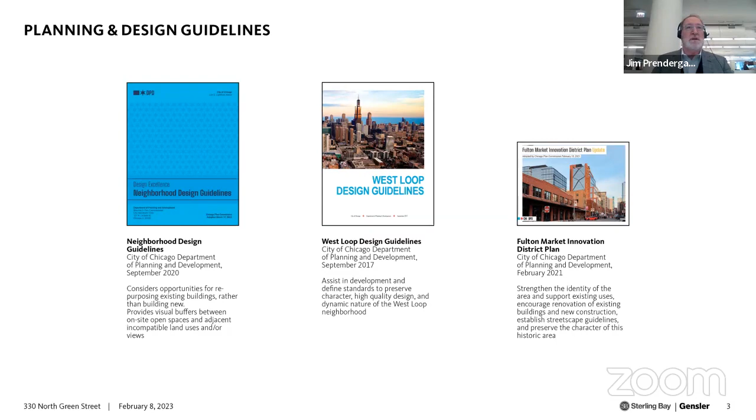So let's talk about where the site is. 330 North Green is directly opposite from 333 North Green. It anchors the northern end of Green Street along the northeast corner of Fulton Market. It is bordered on the north end by railroad tracks, Wayman Street to the south, Green to the east, and Peoria to the west.

Here is our PD application. The original PD application was two sites across this large rectangular or trapezoidal black line, and you can see that annotation in this diagram. The combination of uses around the spaces include restaurant, office, and residential spaces on different parcels around the area.

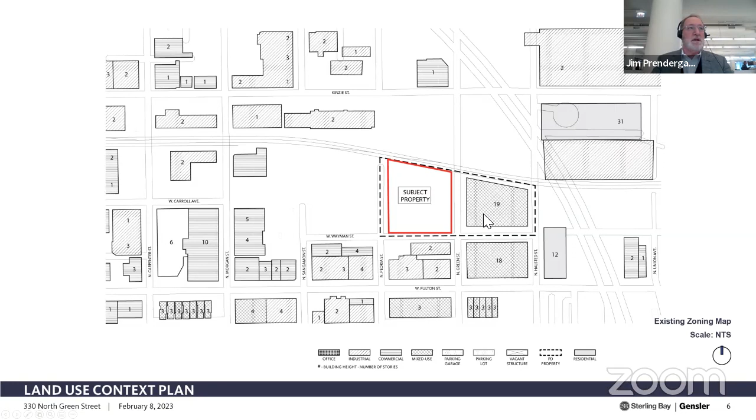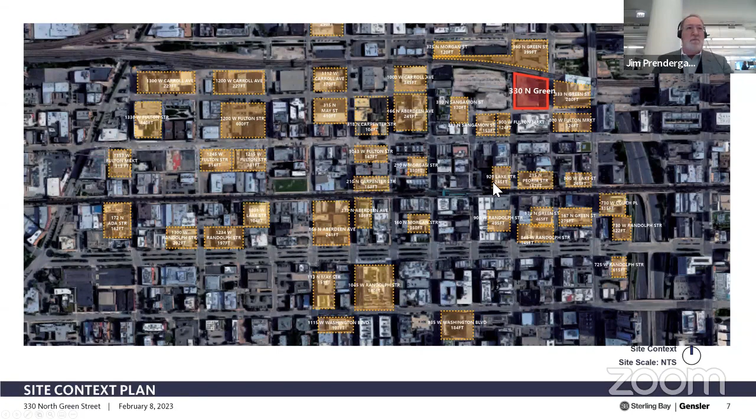Again, not kidding ourselves with the ambitious plans for the balance of Fulton Market. These are a lot of the plans that have been proposed throughout the entire neighborhood, but probably the best way to see it is to look at it three-dimensionally.

Those spaces in orange are spaces that are completed or under construction. Those in light yellow are future developments that have been proposed and or under review by DPD. But the key for us is how our building relates to our neighborhood.

We have 333 Green and 360, and we see as we go through this explanation the idea of how we're creating this kind of urban room, if you will, at the north end of Green Street.

Site orientation quickly: we're in parcels 1, 3, and 2, this larger trapezoidal shape. We're right across the train tracks on our northern border. Right now the space is leveled and open and ready for construction.

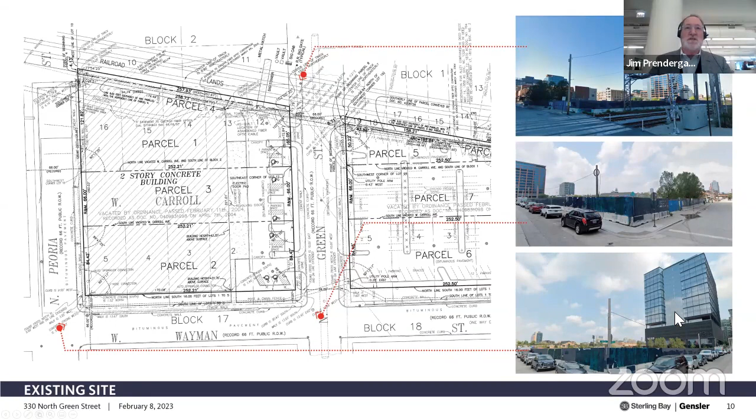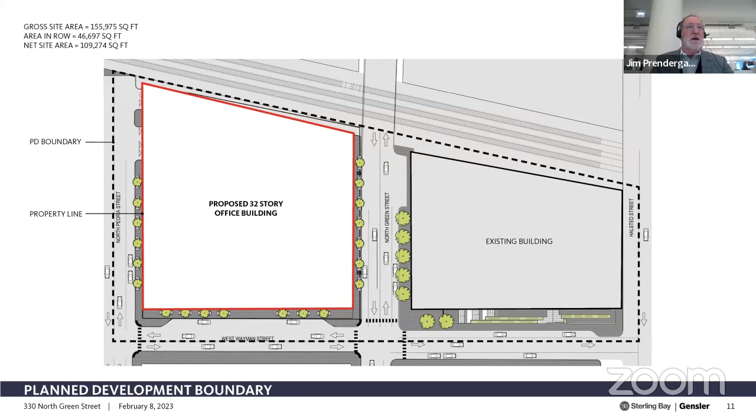Looking east on this bottom image, you see across to 333 Green with this parking podium and office space above. We're proposing a 32-story office building in the parcel that was previously a PD application that was basically a fairly straightforward extrusion of the floor plate geometry.

The original building target tenant was tech tenants, and following that idea, the building floor plates were long and horizontal with high ceilings, but basically a large lot-line-to-lot-line configuration of the whole entire project.

Well, since that application was approved, the marketplace has shifted. What Sterling Bay has discovered is that there's more of an appetite, particularly in this part of the neighborhood, for professional service firm and financial service firm tenants.

They, as a type, do not require these long horizontal floor plates. That's not really consistent with the way they're organized as businesses.

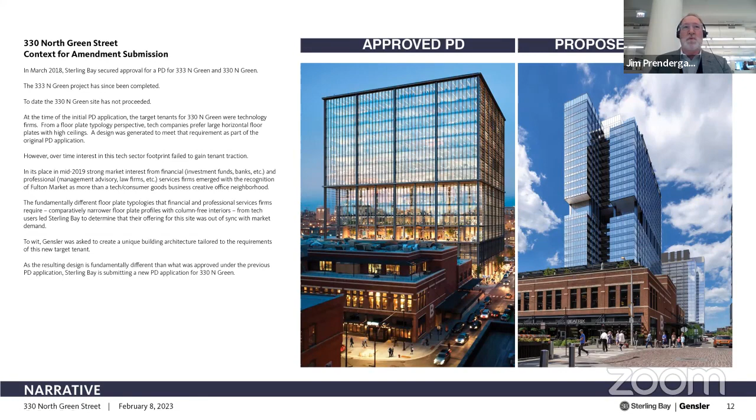So in similar fashion, we organized 360 North Green, and you see in the background there, this under construction, with Boston Consulting Group as our anchor tenant. The building is a thinner and more narrow form, one that we think is more consistent with the guidelines put forward for this part of the city.

So again, comparing and contrasting the original approved PD, you see it's kind of large floor plates at the base of the building. What we're not doing here is changing the already previously approved service access points of the site. Our ramp for our parking and our loading bays are still tucked into the dead-end condition of the north end of Peoria.

Peoria does not cross the tracks at this point, so we still have that condition in our current scheme.

But in this scheme, what we've done is placed our office tower to the west, and that's a pretty important component, we think. What that does is create a very long, over 120-foot-long walkway to get into the actual building. So our scheme proposes the idea of a light court that helps give us an urban space.

This is consistent with a lot of the experiences you see around Fulton Market. You see the covered area listed here, a setback additionally from the property line, then our open-air light court above, leading into one of two entrances to the building. I'll go through that in a little more detail in a moment.

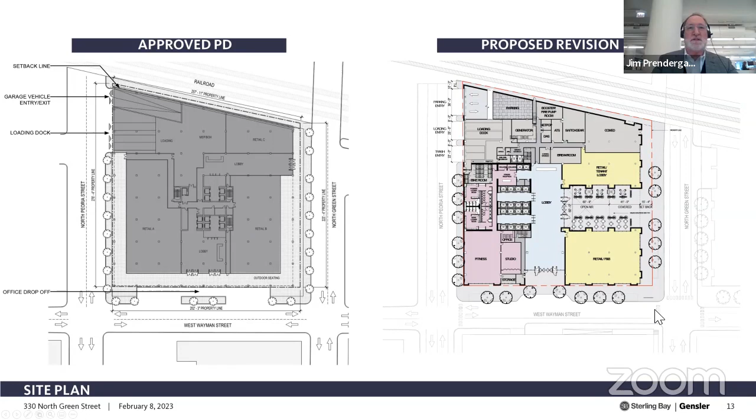But Green Street is our primary address, our naming address, and Wayman is our drop-off pickup for Ubers and other types of transit, to keep drop-offs off of the crowded sensibilities of Green Street.

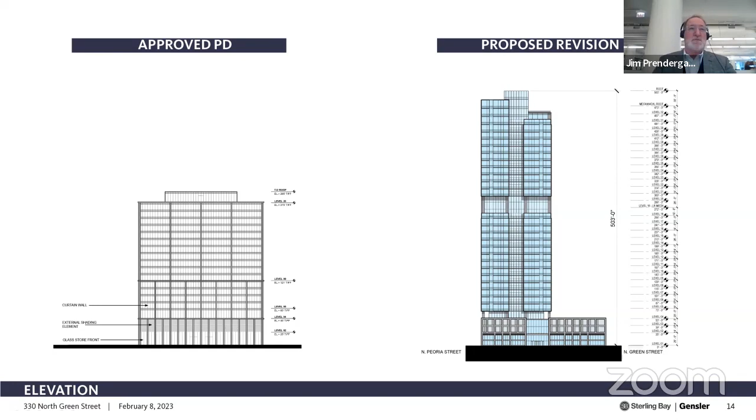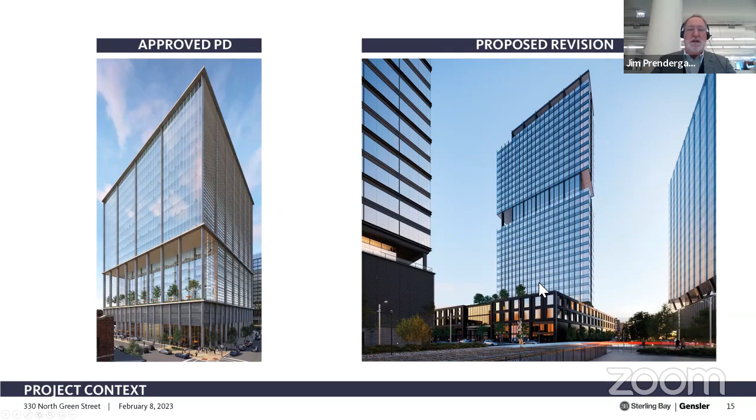Comparing and contrasting the two schemes, these are slightly different perspectives, but the view on the left is looking northwest, staying with Green Street in the foreground and Wayman. And here we are actually at the railroad tracks, so we have our Green Street, and you can see how we've pushed the office tower extremely far back on the site to make the pedestrian experience happen such that you may not even be aware the office buildings are there as you're walking on that edge of the site.

From a sustainability perspective, our baseline is a silver LEED component to the space. However, engaging our new energy code and understanding the ambitions of the public about initiatives for a more sustainable future - we're in early days now in the design, we're only a concept, but the project will be incorporating principles of passive design, advanced high performance systems, and improved occupant experience conditions.

We're looking to reduce operational carbon through facade systems, passive and active design strategies, energy efficient systems, all electric heating. The project will incorporate high quality spaces to promote tenant satisfaction and improve productivity. We'll incorporate design elements for indoor air quality, biophilic design, and sustainable product selections throughout the specification of the project details. We will also be incorporating bird-friendly design strategies, including collision mitigation elements, bird-friendly year-round interior and exterior lighting controls and lamps. No internal greenery will be visible from the outside of the building, and exterior grates will not have openings greater than 3/4 of an inch. These are part of the palette we're working with as we continue to evolve the design, but we're aware of the criteria and interest in these issues, and we're looking forward to investigating them further as we go forward with the design.

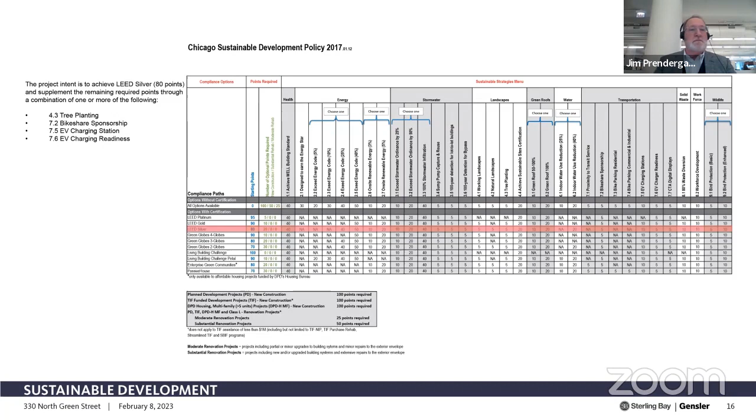Okay, page 17, here we go. So the program brief was about this different type of use for the space. So we started to look at the idea of designing the building from the seat to the street - how do we envision how people will use the building and how that might inform the building's architecture?

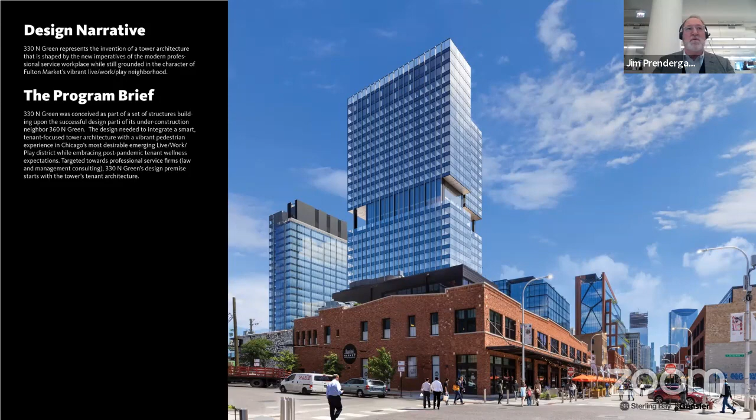We started by looking at first the idea of what we had before, which is kind of an edge to edge form massing of the building. Then we started to look at a point tower, looking at the shape of the building, but making it smaller, moving it around the podium in different ways. But we found it didn't really address the issues of how the tenants will use the space. This point tower concept does not work really well for professional service firms and financial service firm clients. I'll explain that in a moment.

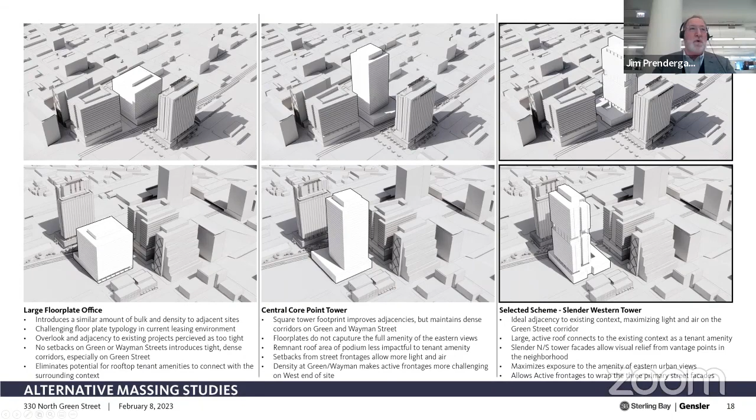So we ended up looking then at this kind of shifted tower plate configuration, and then we experimented with different ways of organizing that on the site. The first thing is to think about how a professional service firm and a financial service firm works - the priority is for perimeter window usage. Actually, their business models have evolved to a point where they don't need a lot of interior storage space - a lot of deep, dark interior space that a rectangle would provide, we don't need. So the concept is to basically not build what we don't need.

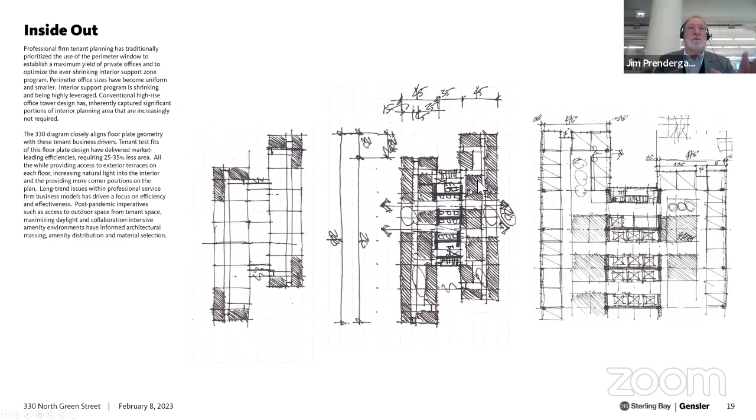So the concept of the building is 2 office blocks, full floor to ceiling glazing for natural daylight penetration and column-free spaces inside. Basically, they're hung essentially on a structural core. It's a very simple concept.

We then looked at the idea - well, if we have that as our typology, how do we move it around the site? Are there any advantages to looking at diagonal orientations, pushing things closer to Wayman, more across the railroad tracks to the north, bringing it closer to be adjacent to Green Street? As an urban gesture, we felt it was best to move it, as we've shown you, all the way to the west, giving views to our friends in 360 North Green to still see down across into Green Street.

Our building on Wayman is on the northern edge of the historic district, so we have clear, unrestricted views for blocks looking to the south. We really thought that was the most urban-friendly and neighbor-friendly configuration for the building.

So this gave us our parti: two office blocks, clean column-free interiors, 45-foot spans, and the idea of amenity terraces for tenants on both ends of the building, tucked into the interior notches between the two plates to help cut down on wind exposure.

This also makes the terraces more intimate in space and helps with leasing. Each tenant on the east or west side of the building can have their own terrace, which goes back to this wellness configuration of having the ability to get outdoors on your floor without having to leave it for a common amenity floor.

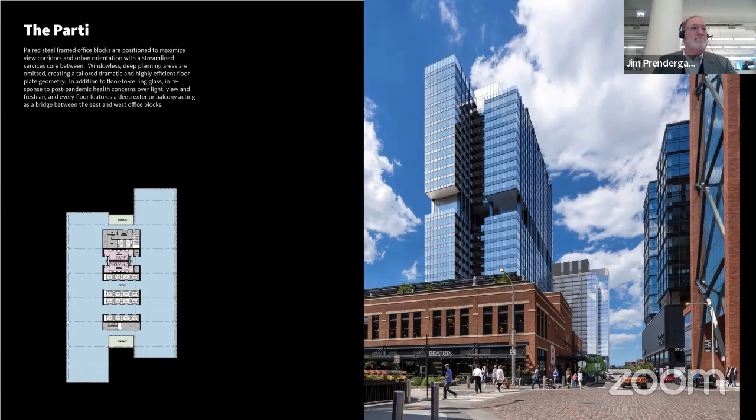Again, the building is pushed back to the west. We have this notion of creating an urban room, a lot of air and light around the office tower itself, being a respectful player with its neighboring buildings.

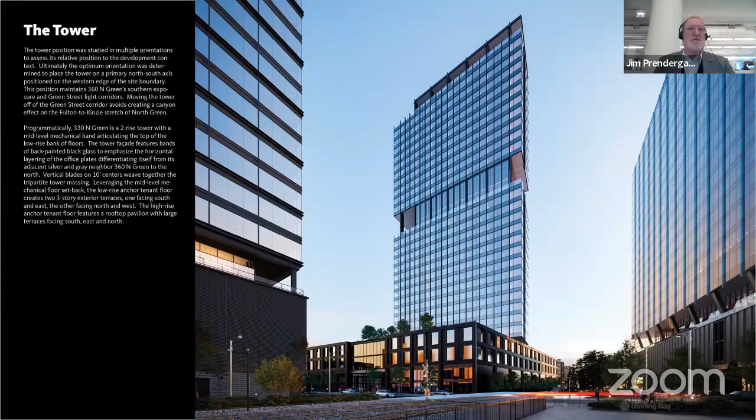The Wayman entrance was important because it touches on the Fulton Market connection and the way we organize the building.

We're cladding the podium in a dark gray brick, echoing the industrial palette of the overall Fulton Market experience, but also creating discoverable spaces at the second entrance, retail on the street level, and connecting to the Wayman experience going up to Wallstead and our friends at 800 West Fulton.

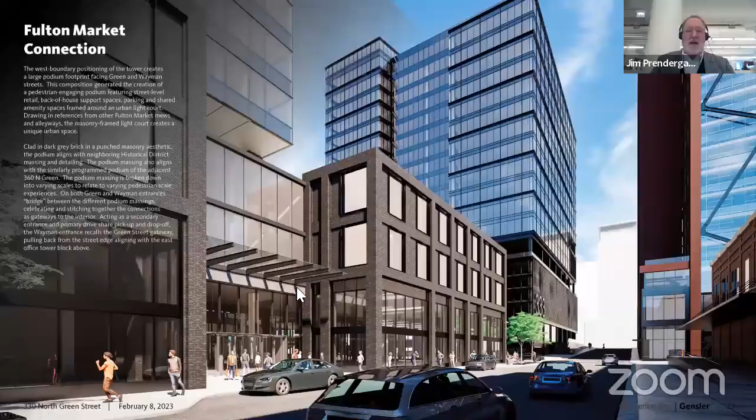The light court is a unique solution for us. How do we manage this deep walking space from green to the office front door? We love the idea of having the space give you a surprise.

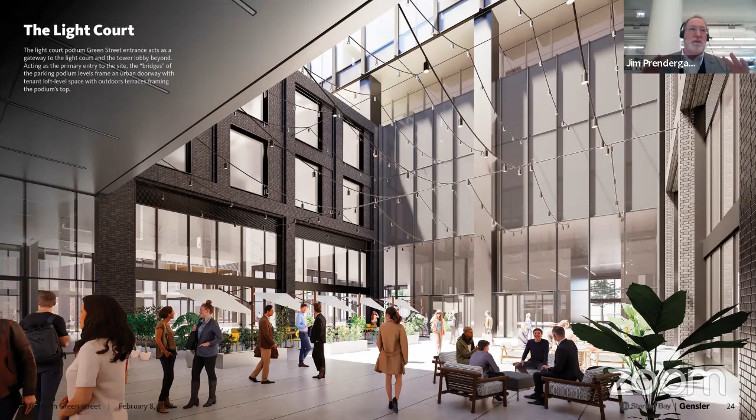Consistent with a lot of the elements in the Fulton Market experience, this journey of discovery lets you learn more as you walk through the building, and spaces become unique and special. This gives outdoor dining environments for our food and beverage options, but also creates a special event space that's physically open to the public and easy to get to.

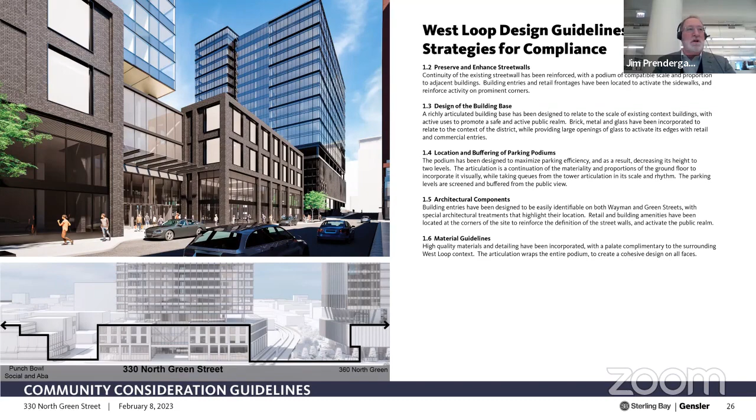We're excited that our parking block is the same size as that 360 — about the same size as the Punch Bowl building. So the entire west facade is no more than a three-story expression across the entire three-block stretch of Green Street.

I'll skip on this since we've talked a lot about it already — the access points around the building, the parking block, amenity space sitting on top of the parking, the office floors, and the elevations, which I think you've seen.

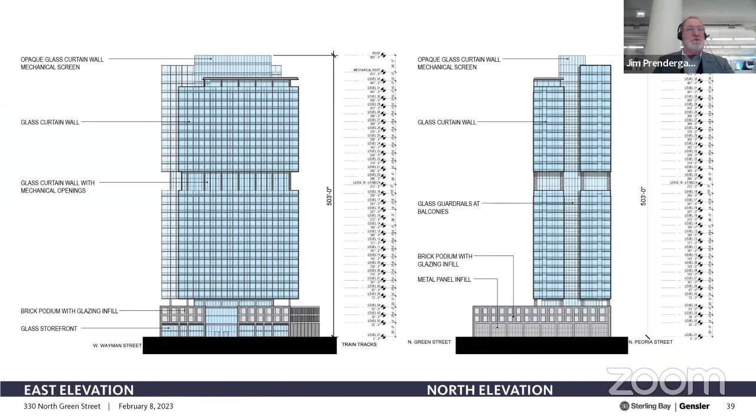This deck was circulated in advance, so I'm sure you've seen these. Staggering the blocks gives us unique configurations so different parts of the building can still have light to the interior.

Our final point is that we're doing a mid-level mechanical design, allowing us to create a two-story space sitting on top of our main low-rise tenant environment, giving a beautiful three-story dedicated space for a tenant there, which changes the shape of the building. It isn't just a continuous block of glass going up and down — there's a separation, a bifurcation to the massing as we go forward.

So with that, I'll pause. Josh, I think we made our time, and we'll open the floor for questions and conversation.

All right, Jim, thank you for this really thorough and inspired presentation. I think you hit the points of where the office is going spot on in terms of the new emerging tenant mix and the amenities and the floor plates and the design implications. The question that's really front and center for this committee, and I think you've had some discussions around this...

Is this — you describe it as a surprise when we enter into the light. A moment of delight, yes. Yeah, and I think that's an interesting description, and maybe one that some may see as a little optimistic.

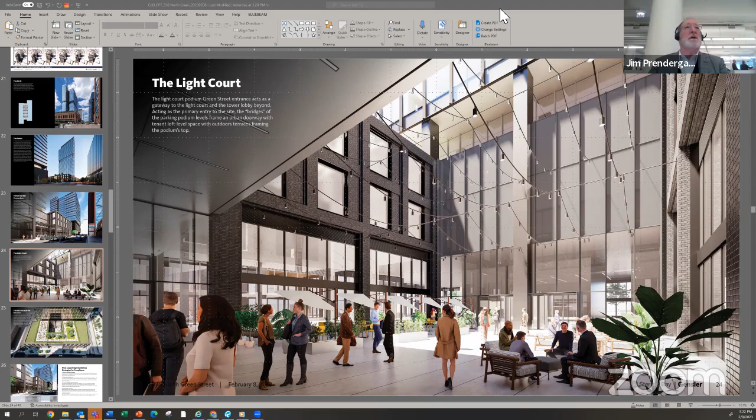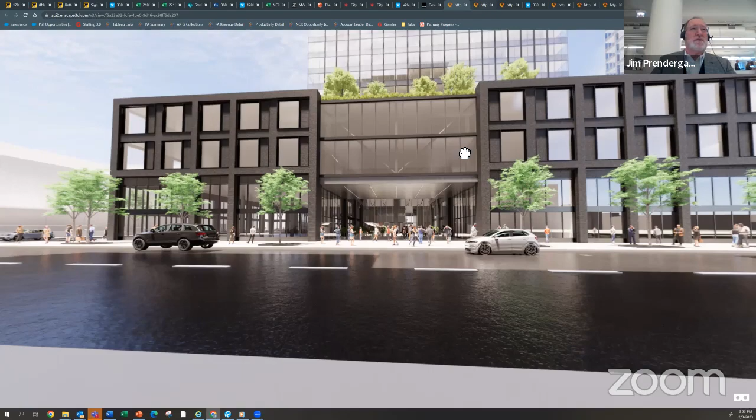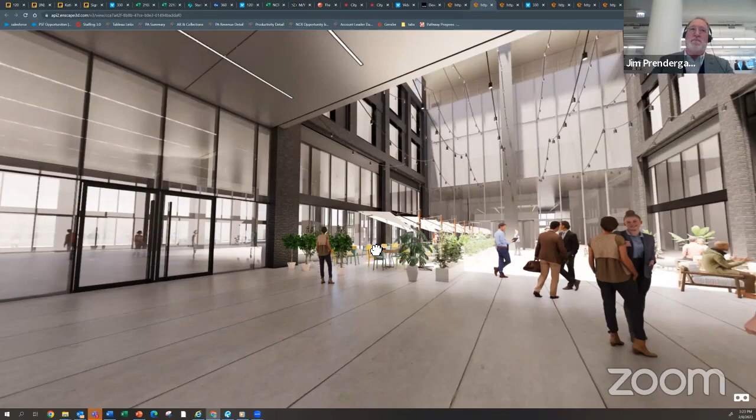If you're looking a little closer in, this is standing underneath that bridge, which is basically the width of a drive aisle and a parking space, so roughly 30 feet. But as we stand at this opening, we think this proportion is very hospitable for people to come in across the space. We've got the restaurant space across the street on Green, and your vista standing in the space, even just a few feet underneath this, you immediately see the light court. It's really prevalent, and it's not a great travel distance — it really makes the 30 feet versus 60 feet work.

So essentially we're talking about 120 feet — about just over 100 feet. This proportion is basically a third of the space is the overhang, and then twice that distance and depth is the actual light court itself.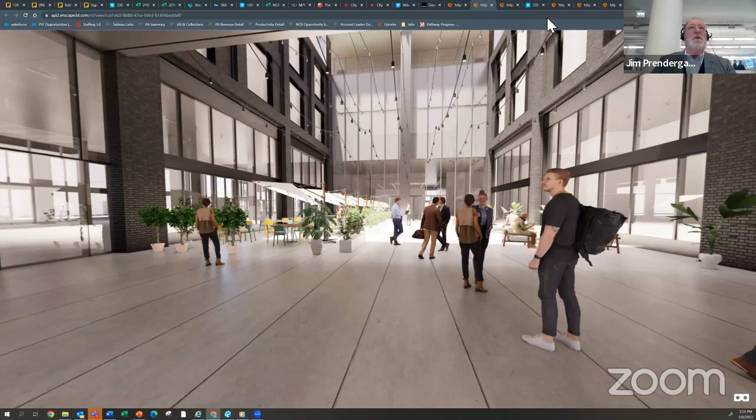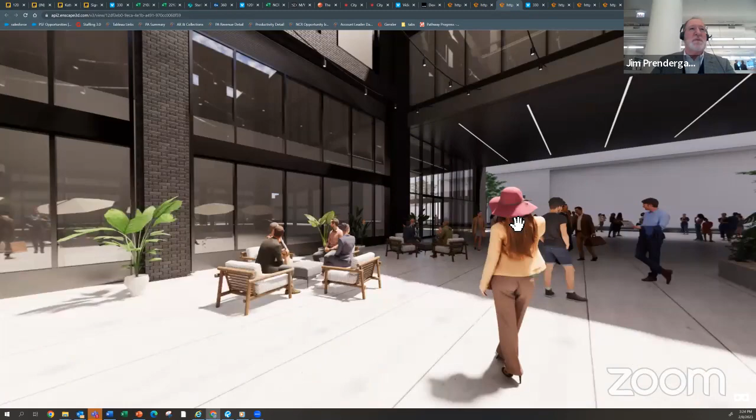If we go in a little further, when we're in the light court looking back at that bridge space, we believe that with F&B located on the corners at street level at Green and Wayman, these will be open areas for their front face, for covered dining, which should be extremely animated and very busy and a real interest for folks to come in. Then once coming in further, you're in this beautiful light well, the light court, as we call it — a space that gives this special kind of meaning: I'm in a unique space that's part of Fulton Market. I can still see part of the city, but I'm in a discreet and intimate environment unique to this building.

And we feel there's precedent at Green Street Meats and other places, or even 167 Green, where you're going through the space and there's a mews. Our space is actually taller and wider than those, almost by a factor of two. So we really think we've gone to some lengths to make sure this space is amplified in its ability to be connected to the street, and for those using it to feel welcome.

Does that address some of your question? Yes, it definitely gives more. I think I'll let other committee members join in, but yes. I think, Jeanne, did you have your hand up?

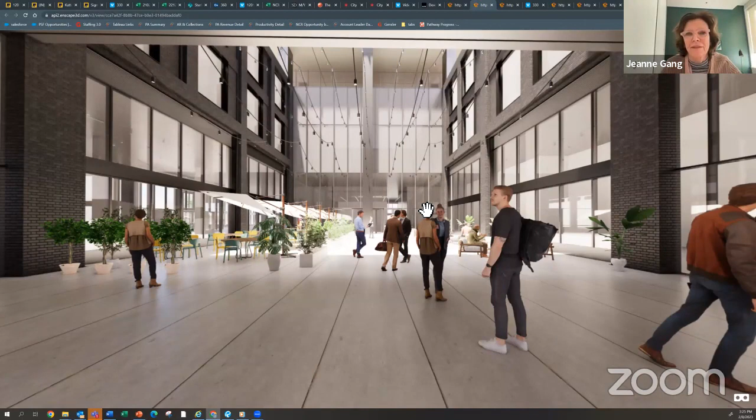Yes, I was going to compliment — well, it's market driven, but I do like the new massing better, because it feels more in keeping with the district, with the low kind of base and then the narrower tall building, as opposed to the blocky building. So I think it's really nice and brings in a lot of daylight and things like that. That part of the upper volume is really well situated and appropriate.

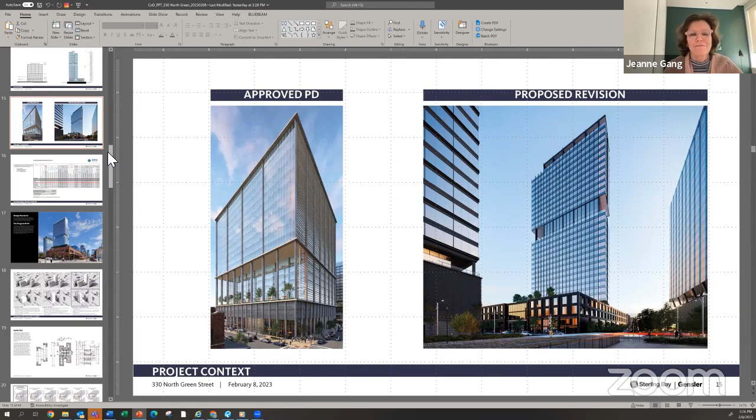And then it's really just about how public, I guess, the space is. It is nice to enter in there, and I was just wondering, because of our climate, that is good — it activates it in the winter. But just maybe a little bit more about the ideas about what kind of retail spaces, will everyone feel welcome to walk in there?

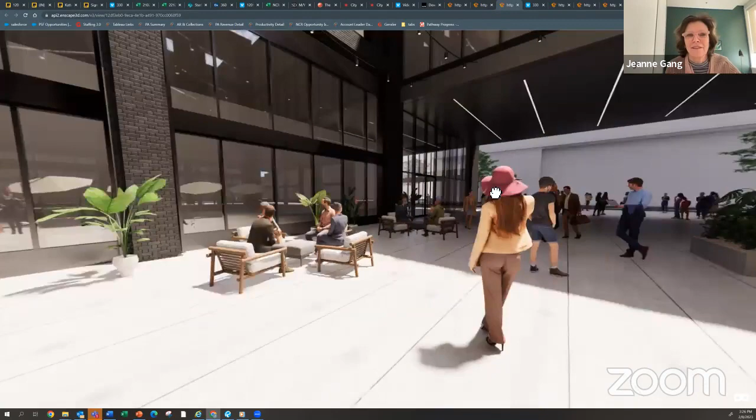Kind of the same lines of the last comments, and I do feel like it is a good quality space to have in the city like that. And so that's one point, like, how do people feel welcome coming in? And the second question is, when you increase the setback along the east side for the sidewalk, how did you decide to do it on that side versus, let's say, the south side, or what was the criteria for that? Oh, that's a good question.

Let me first address the comment here. One of the things that Sterling Bay brought to us was this notion of how do businesses survive in pandemics or crises? We all saw how dining establishments really struggled, especially in winter months and cold weather, to bring people in and keep the street life alive and keep those businesses vital. One of the things we liked about this condition was we had the ability to provide a bit of both, so God forbid we end up with another health crisis at some point, which I think is wise to consider.

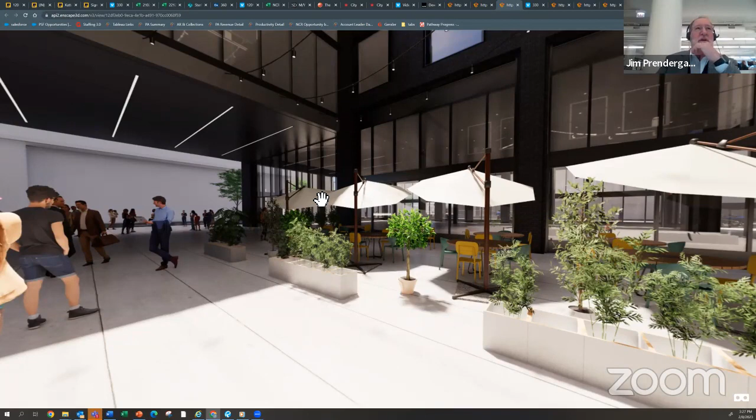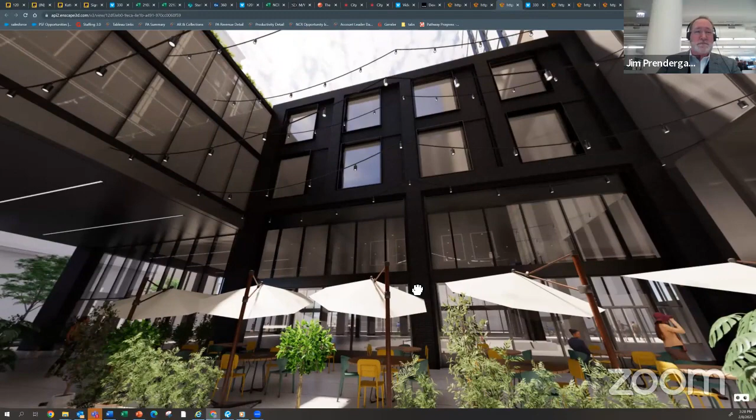It still gave us a bit of redundancy, if you will, to have the ability for a tenant to still be able to reach their clients and have a comfortable space to eat in. Because our primary sense is the retail functions would probably be F&B, imagine this in winter when there's snow coming in, the magic of being in this space, with snow drifting down on you while you're sitting in this kind of beautiful little exterior room.

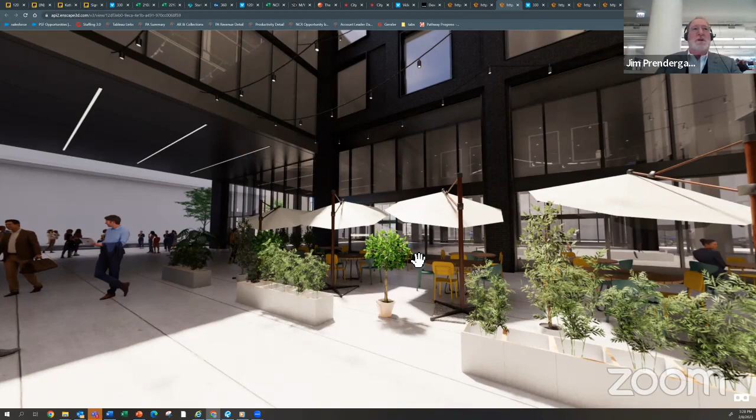So we found it to be a very unique offering and charming, one that could actually accelerate the attention this might have with the tenant, because it's giving basically two frontages - the street on Wayman and Green, but also a new quote frontage in the courtyard. It gives them a lot of access to a visual connection as guests walk past to see and learn more about the restaurant, get a sense of the vibe of what's going on inside the space, but also have a little forecourt of that experience inside our courtyard.

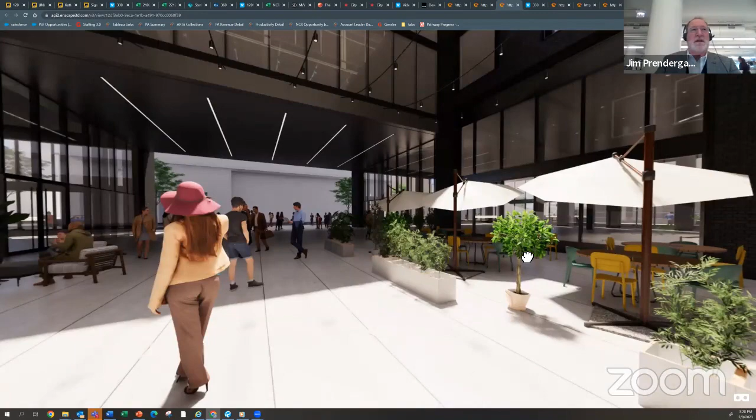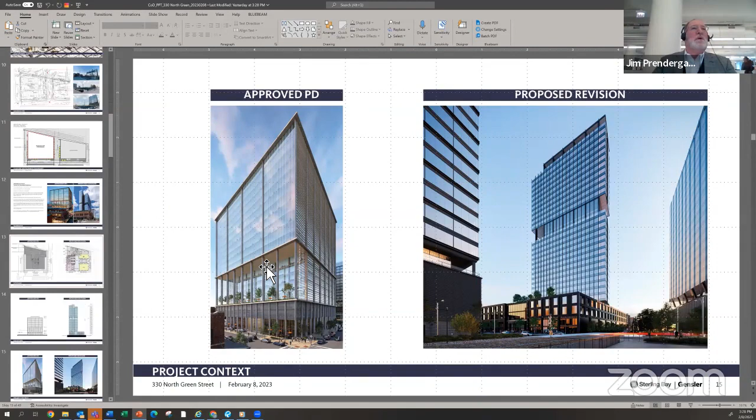To address your point about the setback, let me go to that page. So we looked at the setback because there were some concerns about congestion along Green Street, even as a pedestrian. There's a little bit of a pinch here at the Punch Bowl area, and we felt that giving some relief on this end, because it's still going to be the business address - it will still be 330 North Green - we still want to encourage foot traffic for retail, but also access directly into the elevator lobbies as one enters the commercial space. That seemed to be the most important area to give some relief.

It gave us a reason to also push back the entrance point along Wayman for a similar reason, to give people pause, the ability to stand out of the weather and get out of a cab and into the space quickly, but realizing we're going to have walk-by traffic here. We have train crossings here, so we wanted to make sure we weren't cramping the perception of being cramped in as you walked along the north extension of Green Street on this side.

Does that answer your question, Jeanne? Or at least address it? Yes, I think that addresses it, but in a way, the question of where to push back is really interesting, because on the one hand you're giving more space on the east, but there are the train tracks and everything, and I'm wondering about the corner and the south side of the building, where it's more pleasant to be outside, maybe.

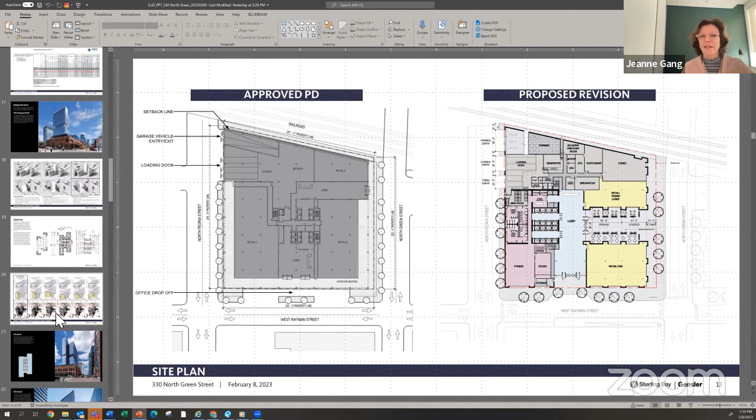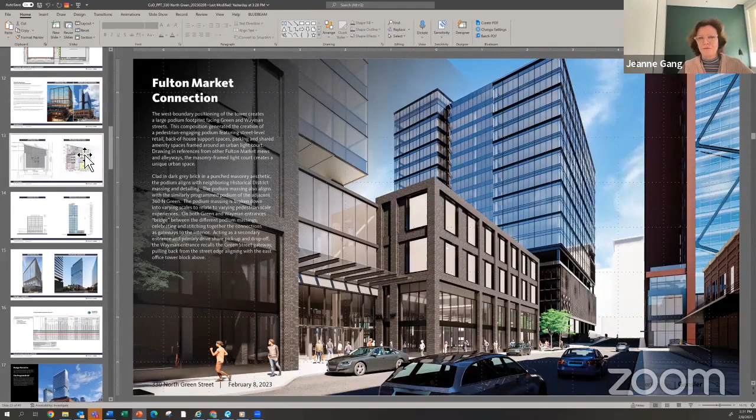Interesting point. I was thinking about the south edge, this edge here. It's hard to say without the full context, but I like that the street is widened there. I'm curious whether you studied the amount of foot traffic, because there are train tracks there, so it's hard to imagine the east side is that busy. I'm wondering if the south side isn't a better place to offer it, or maybe the corner. Those are the questions.

Our center core building kind of implies a certain access coming into the core, into the building. So that's one thing. Our parking grid also has placed all these things interlaced. So that impacted a little bit of it.

We're also thinking about a lesson we've learned from our 360 Green experience, which was the optimum space the market wants for real prime retail restaurant space. Frankly, our 360 Green space is proving to be a little tight. So in laying out this space, we wanted to give us a little more wiggle room, and we thought if we had to choose a site to pull back from, Green Street might be the better part of valor to pull back from there.

But also from our parking plan, not to get too detailed, but when we look at our parking plan widths, to get our ramp in here and efficiently lay out our parking numbers, we kind of end up being on that southern edge. If we moved that in, we could study it, but I think that would pinch the efficiency here. We're right on the edge of being under, or right at the edge of being parked for the occupancy demands of the building from a tenant point of view. So we're really anxious about reducing any parking spots in here, because we're probably going to be under what we're allowed to have by PD for the previous PD, making sure we've got MOPD requirements accommodated, et cetera, and getting this the most efficient plan here to also keep our parking block as low as possible. So as you can appreciate, all those elements kind of interlace with one another as you start to lay out the building in more detail.

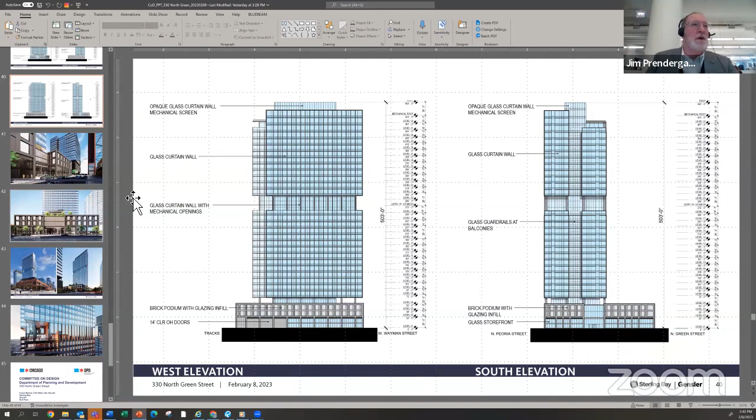We had an image that Katie made me take out, looking up at that image, and you can see these things all in the same plane. So visually, we want to do exactly what you described: bring the edge of the building down to the street, so that this edge and this edge are all in the same plane.

So if you were to stand here and look up, this is all coming down to you right down to the street level. Well, not physically coming down, but we were able to keep the planar condition in alignment to bring that impression as you hit the street.

Whether that works enough to address your concern, I can't say, but that's one thing that's always tried to address it. Your other comment was about the setback or the condition of the bridge.

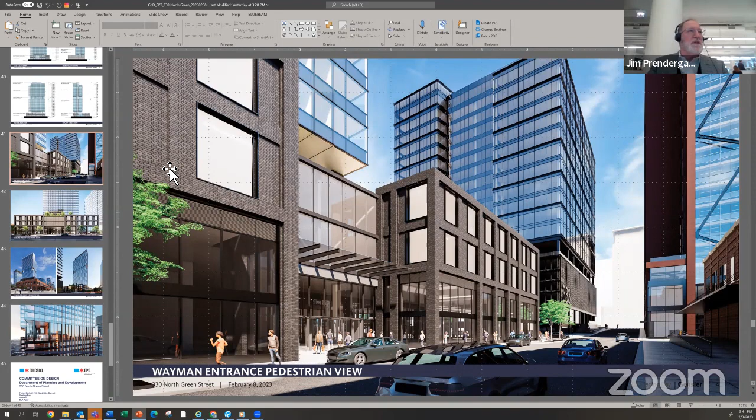So the bridge right now, this might be a good time to bring up one of the ideas we've heard from DPD and team. Right now, as you remember from the plan, there's parking here and a drive aisle behind it. There was an idea we modeled up in one of the schemes that started to look at eliminating the bridge, and it really becomes a handicap in our parking components.

As I mentioned, we're already pretty tight to what the marketplace is going to expect for a building of this scale for parking, and we lose 12 spots. 12 doesn't sound like a lot, but when you're already at the precipice, it's material to us.

So what we looked at is the possibility of moving the bridge back and keeping the parking spaces. It does adjust the proportion of the light well, of the light court, but it does diminish, and actually you could even say announce more clearly, the effect of the entrance of the interior space.

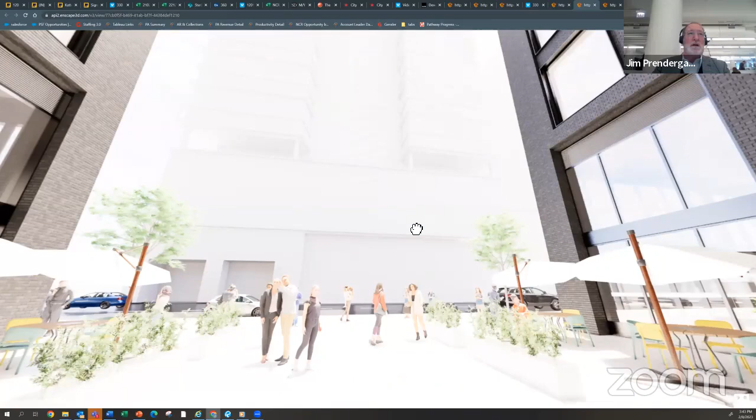Here we are inside, underneath the bridge, but the bridge then has more air, if you will, at the street frontage. As we look up, you could argue perhaps it's a bit more welcoming. We indent the public zone totally open to the sky above. And then as we walk into the space, that space becomes perhaps still that kind of found jewel. We're looking back then at Green Street, the same distance, the same 30-plus feet of that bridge, but now the light court is smaller.

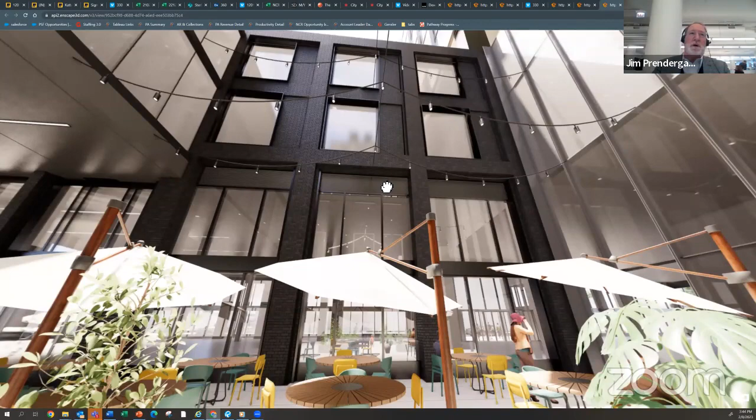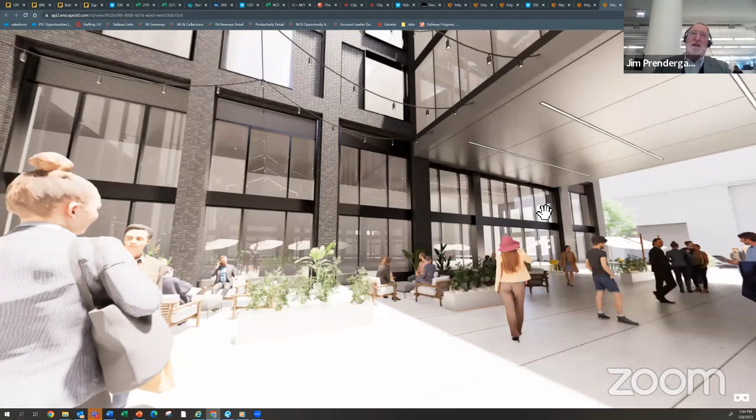And Jeannie, to your point about what kind of light will we get in, the smaller it gets, of course, the light angles, or how much time this north facade is going to get southern light, shrinks. But we've talked about the idea of vegetation on this side of the plan to really make this a living space, so it pops and embraces the notion of its southern exposure. It takes a different proportion, being, as I say, just a 40 by 40 square, looking up to the sky. But we like this idea as perhaps a compromise of showing how these two elements work together.

And the other thing it does is make the entrance off of Green Street, with the indentation, identical to the indentation, the condition off of Wayman, where we have the indentation. So if I go back to the PowerPoint, you can see it here - this indentation is the same. So it brings a scale of not being full-block-long facades into play, into the overall composition.

And it gives us the ability to articulate the entrance on Green Street. We hope that entices the idea of the invite of the urban, extending our hand and welcoming our public to the space, and still having this generous 60-foot wide, 22-ish foot high space. And the underside of the ceiling, we should also say, is a placeholder.

We don't know whether we might end up exposing more of the structure or making this a lighter surface, something more rugged or gritty, so it isn't so corporate looking, to make it feel more as if it's a bridge, and celebrate this motion idea of moving from one block of space to another.

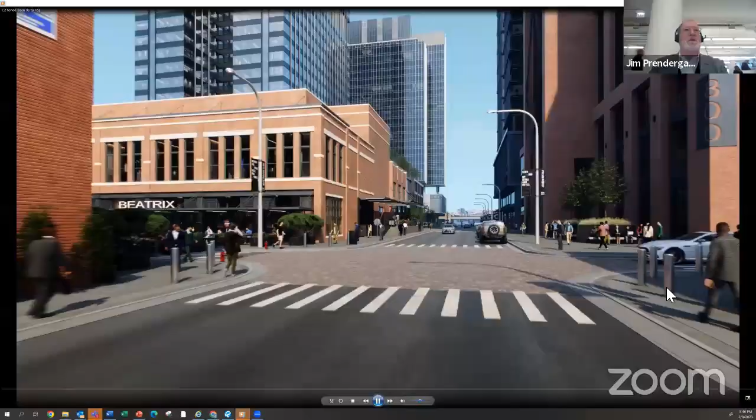One thing we wanted to show you, if time permits, is a series of marketing videos we created for the building. Let me try to get this to play on your screen. Give me a moment. There, you can see it now. Can you see the animation? Okay, let me pause it for a moment.

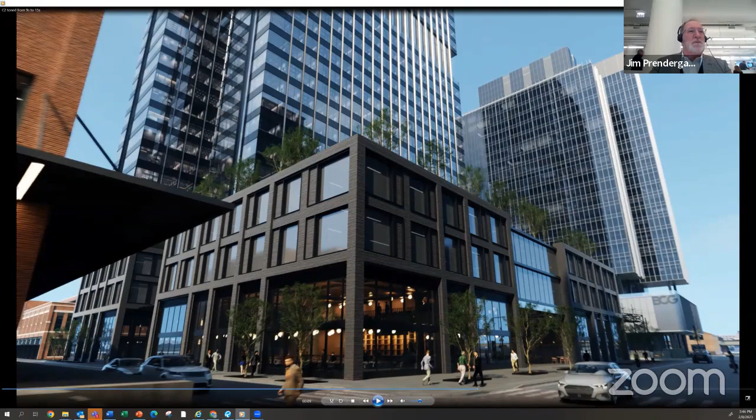This is our current scheme, and we're traversing north on Green Street. We're approaching Wayman, and we pause here. You can see the indentation already on Wayman, the tower above, and 360 Green beyond. As we keep going, we drive by the building, and for marketing purposes we panned up at the building.

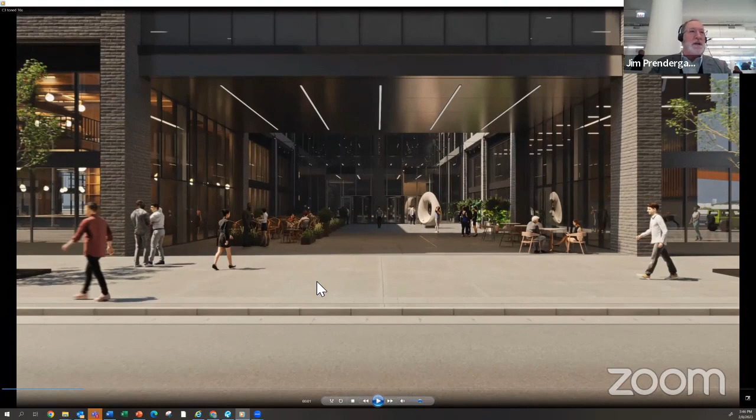Another interesting view is to stand across the street and walk in. So here we are on Green Street, walking west, and as you mentioned, Jackie, it's a portal, but a substantial one—3-to-1 proportion, three times as wide as it is tall, 60 by 22 essentially. As we continue in, you can see the amount of light penetration coming in, so we think the south facade could be really something for public art.

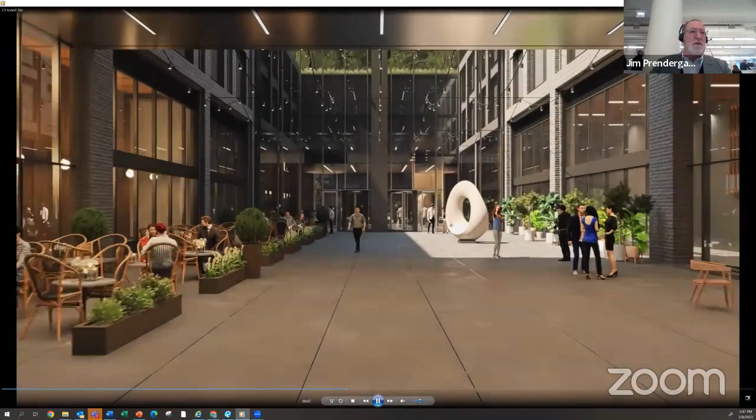And as we come into the space, the structure of the tower comes down to the ground and in between the other blocks of the buildings, so we get this really heroic, unique experience.

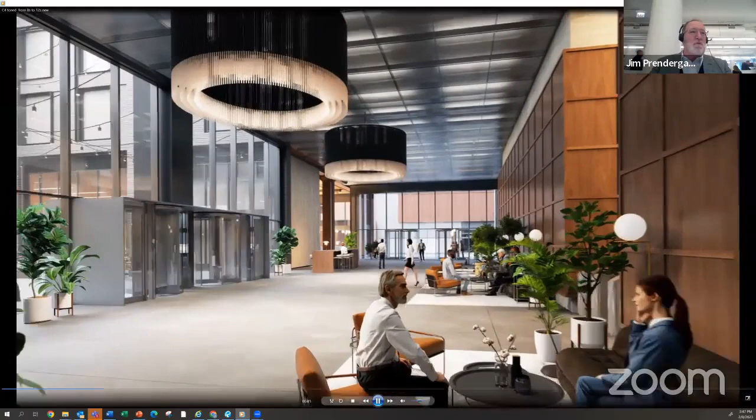The last view I'll show you is from inside the building itself, from the lobby. There's the Wayman entrance beyond, straight ahead is that Wayman setback. As we continue to pan across, we look back into the light court—that's the current size, and you can see it's a pretty comfortable scale, again being 60 by 60, and that's the bridge element across. You can see all the way through to the Green Street facade as we go across there.

Let me go back to that. We want to share those ideas with the committee. We're listening, we hear what you're suggesting, and we're considering all of those elements, still trying to weave them into the lattice of functional crossover and complexity of a tall building, but still trying to address some of these notions around an urban fabric condition that you're trying to see magnified in the design. I'll pause there and see if there are any questions or comments.

Thanks, Jim. I think it's an improvement. But one other question—

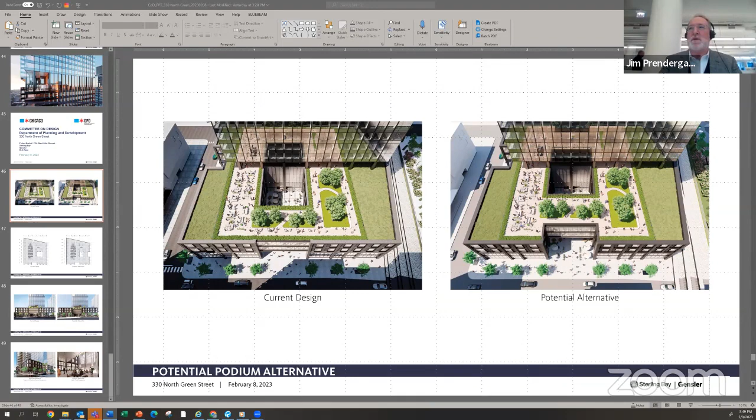People from the public are wondering if the parking count is a requirement by the PD, or if it's something you guys feel is more marketable. The original PD had a combined number of parking spaces for both parcels. So the amount of parking available to us by the current PD—and again, we're not amending the fundamentals of the PD, just the design that sits within it—I think, and the rest of the team can correct me, we have available about 207 spaces.

Given constraints of the design—keeping our podium down to two floors, the light well we think is important, and the ramping—we're only actually achieving 190, so we're not even achieving what the PD limit allows us; we're going a little less. That's why I said earlier we're right at the line of being viable. When we're talking to tenants about how much parking they'd like for their executives or staff, the Sterling Bay leasing team is telling us we're right about at the Rubicon—right about that line.

Okay, does that answer your question, Jackie? Give you some context on how we got that number. Yeah, thanks, Jim. Okay, we're at 95 spots a floor, something like that. I think, Phil, do you have a comment?

Thank you for this presentation, I think it was really well done. I very much liked your original principles of this vibrant public realm, and clearly you're trying to get there with all the effort your design team is doing to look at this ground floor, maximizing light and air, and this idea of rethinking the punch bowl, as you called it, into a thinner, more slender tower. This all seems to be in the right direction.

I very much appreciated your summary of your energy aspirations, going beyond silver LEED to respond to this new energy code. As you describe your passive design and your efforts to reduce carbon, your material choices, your ideas about a bird-friendly building, I encourage you to keep articulating that part of the story, because as the design committee we have been encouraging this with many design teams. I appreciate that you offered that without us having to ask.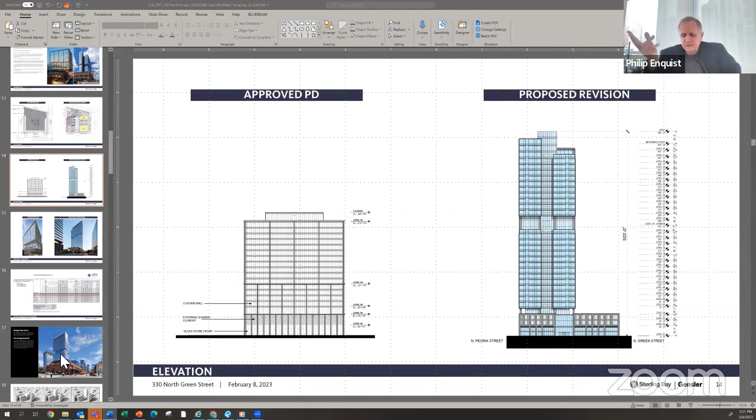And I think Jackie's comment about how the facade of this new massing, especially with this broad west-facing facade, is responding to specific site orientation would be of great interest to us—how you're reducing heat gain by this large glass west facade.

Why don't we—my last question just goes back down to the ground plane with everybody else. I don't think you really have to go into that, but I would encourage you, as you continue to refine the design, that you've got an energy story here that's really innovative and is inspiring the next generation of Fulton Market buildings.

Well, thank you. We certainly see this building as being part of that conversation about the future of Fulton Market. This is not another steel and glass or factory redo kind of aesthetic—we're looking at a very forward-thinking building, and that's what tenants looking to come into this market now are looking for. The team has done a lot of great work absorbing the nuances of the new energy code. We're looking at window aperture proportions very carefully, trying to use as much passive potential as we can, and doing a lot of aggressive energy modeling. It's still early days, but we understand your comments and in many ways we're trying to get there as well. We appreciate it.

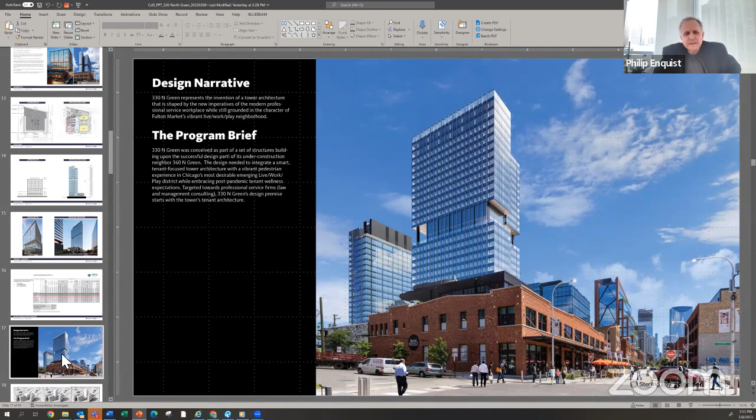If I could add on to everybody else's comments about the street level and ground plane—I do understand the emphasis of Green Street. I'm walking Green Street more and more every day as I teach at UIC, and Green Street has become this great street to walk down all the way. It's fantastic, it is amazing.

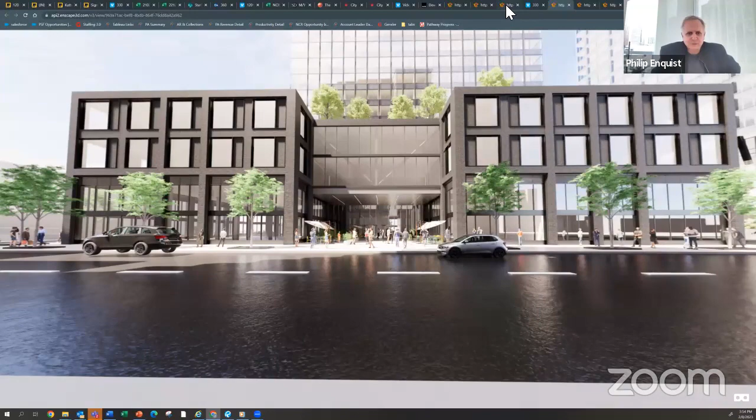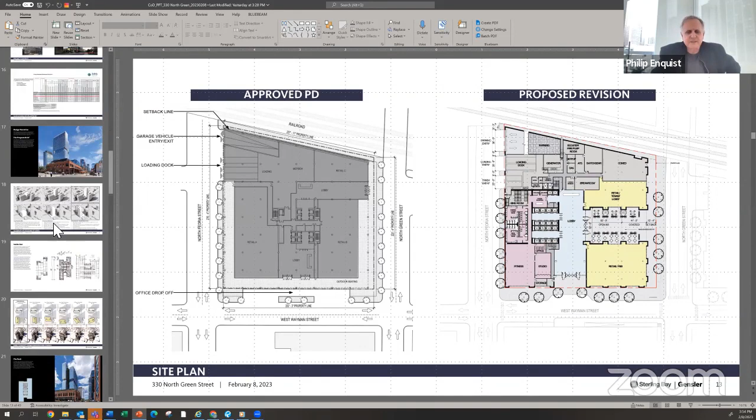I just wonder about is that atrium space big enough—does it really get the vibrant public realm you're looking at and maximize light and air? And I wondered if the 12 parking spaces are worth it. If you could bite the bullet and eliminate those 12 parking spaces, you could eliminate that bridge, and if you eliminated that bridge, your courtyard would be so much better. How critical really is it to maintain those 12 parking spaces versus getting a much more successful public open space? Maybe that's a question for you and your design and development team. But that single-loaded bridge over that courtyard, whether it's recessed back or not, I wonder if that's really worth it—you've got circulation through the garage without having to have the bridge. I just wondered if you could live without it, and I think the project would be a home run.

We did—that was one of the considerations DPD had also shared with us. As a team, we looked at it and we're a little concerned about the cul-de-sac nature of getting in and around the parking garage. Those 12 spots are, as I said, really on the razor's edge, but your points are well taken and the team will certainly take it into consideration. What we're seeing in so many other cities is designing parking garages above grade to be retrofitted into occupied space, and as autonomous technology continues, the need for all-day parking is going to reduce. So I'd love to encourage you to challenge yourselves on those 12 parking spaces. We hear you. Got it. Great, thank you, thank you.

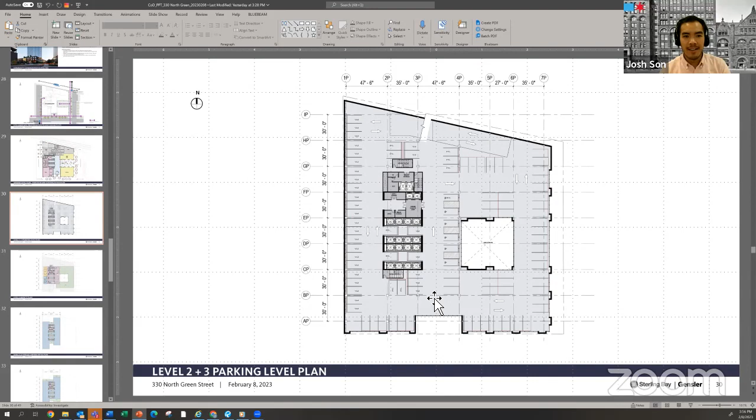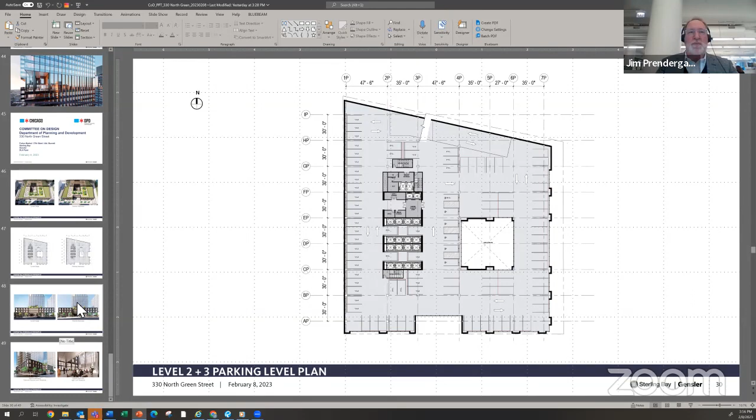Leon, comments. Just one quick follow-up question for Jim. Even with the bridge recessed, is the idea that the bridge is translucent? I wanted to know if it would be solid, opaque, or translucent. I think we're still studying that, but our sense is it could be opaque or frosted. It would not be clear.

We're rendering it as frosted or somewhat obscured. We're still early days, but we're thinking about the idea that this would have to be a truss to come across this 60-foot span, and celebrating that somehow, so we just see the ghost of the structure behind it. And if we have parking here, we have our crash wall in front of this, so it would certainly not be clear, and frosted in some respects.

These panels are opaque here on the facade; they are not clear. But it gives us, we like the way it breaks up the rhythm of the long facade and gives it some animation, which we thought was a positive development in the overall scheme design.

I think Phil certainly articulated a pretty compelling argument for additional study of it, but maybe there's something to do there that could celebrate that entrance a little bit more. I'm sorry, would that mean the way the bridge, that piece? Yeah, its articulation and how it receives. I see. Very good. These are early days, but yes, absolutely.

That is art, public art. Something that would give something. Interesting, we talked about that, good point.

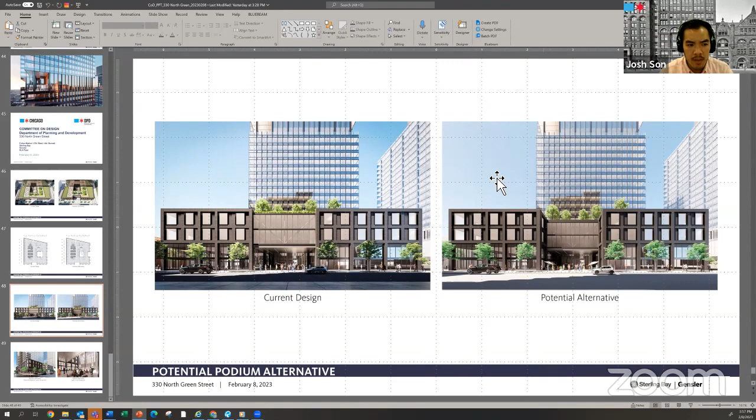Are there any other comments from the committee? We're getting a lot of comments in right now from people comparing parking numbers with other comparable projects, and they seem to be much less. I don't need to go through all the comments, but it reiterates the challenge to the development team to see if they really need all this parking.

Can't see the chat box, so I don't know. Yes, okay. Can someone from the city team comment on that? The parking that's needed? Sure, can you hear me?

Yes. The underlying zoning for the approved PD was DX7, so for office space there's no minimum requirement. But since it's an approved PD, it was approved with a certain amount of parking spaces, so they would have to amend it to reduce any parking required. Technically they could do it, and we could do it through this review process.

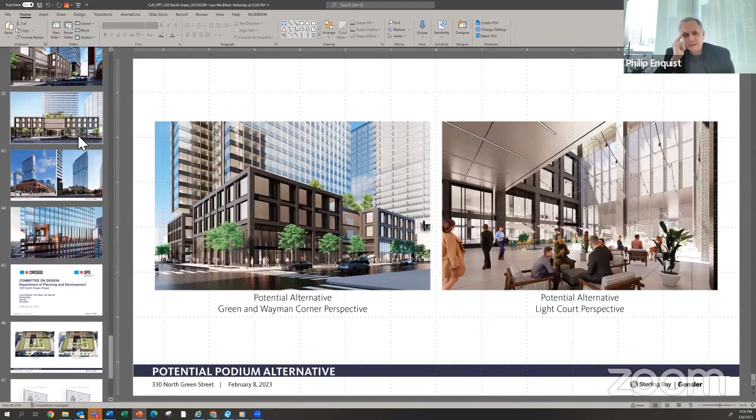They've already taken a floor area bonus and paid into that. It is a transit-served location, so they could reduce the parking further. That's basically what's available to them. I see.

I will say that the public benefit is also related to the decision-making process around parking numbers. But as a positive in the amendment process, open to the sky, covered by planting, accessible public spaces benefit the everyday citizen. If what it takes is to reduce parking, that's one thing, but the ultimate public benefit is the most important criteria.

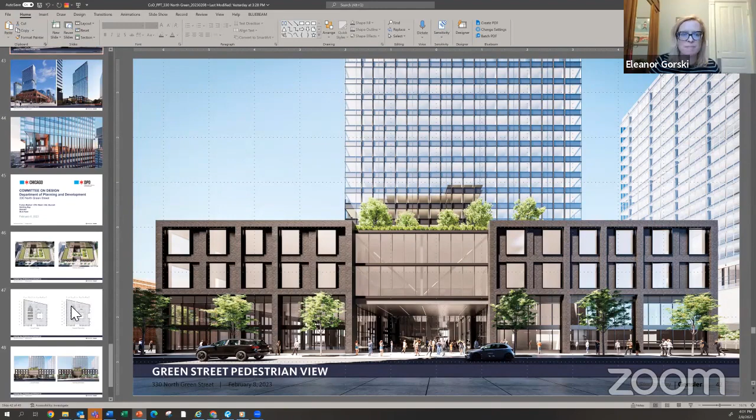So it sounds to me like removing the bridge and the parking spaces there, and figuring out how to make the circulation work in those parking areas, may be a nice compromise. We did hear from the development team that they need the amount of parking to accommodate potential tenants, but I think you've heard from the city and this design committee that we would like to see this bridge removed and the courtyard more open.